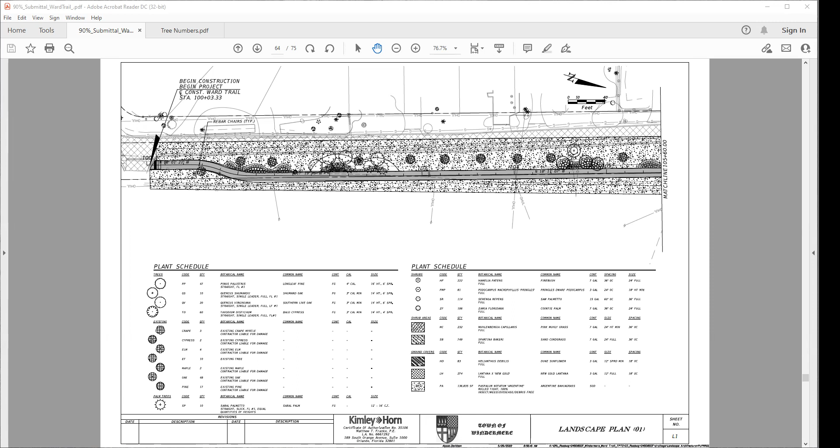So yeah, it's mostly staff. This presentation is for you, but it will be posted on our YouTube channel and social media site. If Mike just wants to give a quick overview - we do have two council members online right now, Councilmember Davitt and Councilmember Martini, and Chris Davidson, I believe, is with KHA. That's right, Chris is our primary roadway designer for this project. All right, thank you. That's Mike Woodward with Kimley-Horn and Associates. They've been working on this for quite some time, and we are still awaiting, hopefully, funding from the Healthy West Orange Alliance, which has dedicated about $5 million to interconnecting all of the trail systems within West Orange County. With that said, I'll turn it over to Mike to present the 90% plans.

Great, thank you, Robert. Hopefully everybody can see my screen, but what I want to start with is near the end of our plan set. Robert mentioned we're at 90%. Once you get to the back, that's where our landscape plans start. Page 64 out of 75 is the landscape plan. So I am going to spend some time explaining these and going over some of the different areas that our landscape architects came up with to really make this area special.

A lot of the alignment is similar to what we've presented in the past, but we have made some additional changes, primarily for tree mitigation. We had several meetings in the past. We walked the site early on. A separate arborist was hired by the town and walked up and down with town staff to figure out which trees were invasive, which ones should be removed, and to account for all those things.

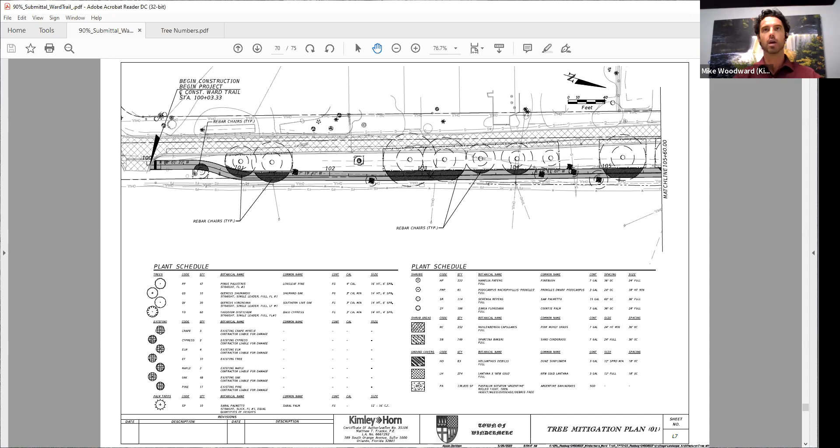So we took that arborist report, and since then we've even modified the alignment - that was back in December 2021. Since then, we've modified the alignment further to move even more, to provide more protection. Some of the recommendations were to do root protection or root pruning. And where we thought, well, maybe that's not enough, can we move the trail a little bit farther over to avoid more of that critical root zone? So we did, and by doing that, we were able to save even more of the trees.

So what you see here, starting on page 70 out of 75, is the initial critical root zone, which is the first circle going around the tree. Then that second, larger circle is more of the total size of the canopy. If you go through a portion of the area in that outside circle, the tree's going to be okay as long as you're not taking about 50% of it. So if you look at the trees, for example, at station 101 plus about 20, we're able to keep those trees by shifting the alignment and staying a little bit farther away.

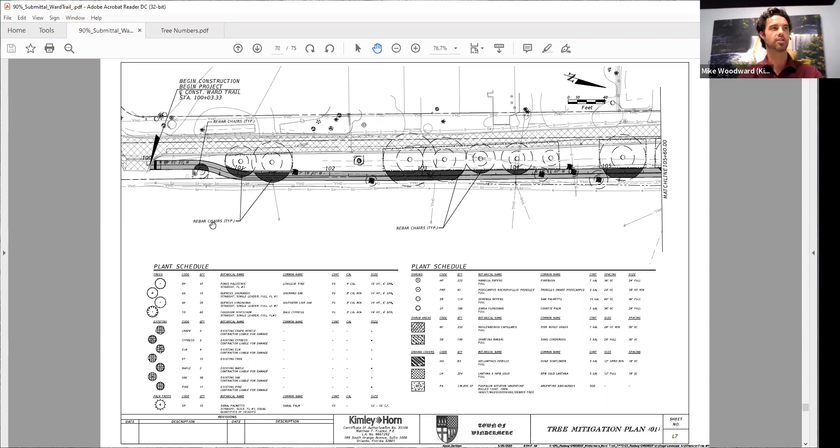You'll also see this note about rebar chairs, where we have a detail showing what that looks like. Basically, before too much construction happens, we'll go in and set these rebar chairs that allow the rebar to be a little bit higher than normal. We'll have specific notes for the contractor to place washed stone carefully to avoid damaging the exposed roots and not compact the soil in those areas. By doing that, we can provide an extra level of protection for several of these trees. So anywhere you see in this tree mitigation plan this dark hatching, that's to indicate the rebar chairs.

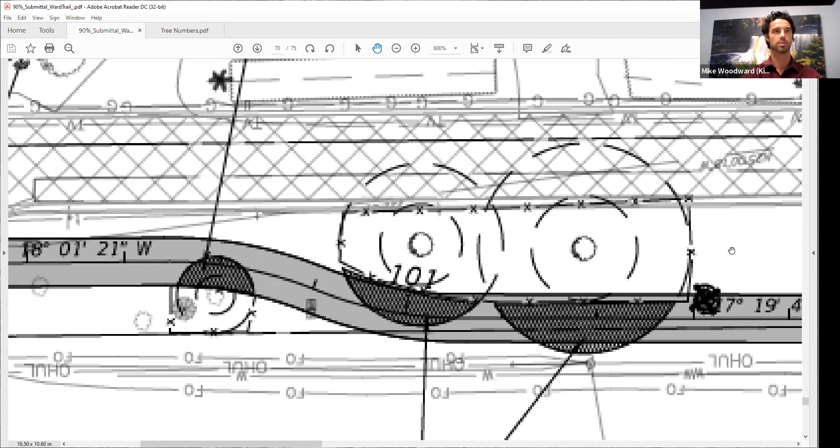Another element to point out here: this little fence with the X's is a fence to protect the root zone of the tree. That would go up before construction starts and stay in place the whole time to protect the tree roots. In addition, we're calling out where to put in rebar chairs.

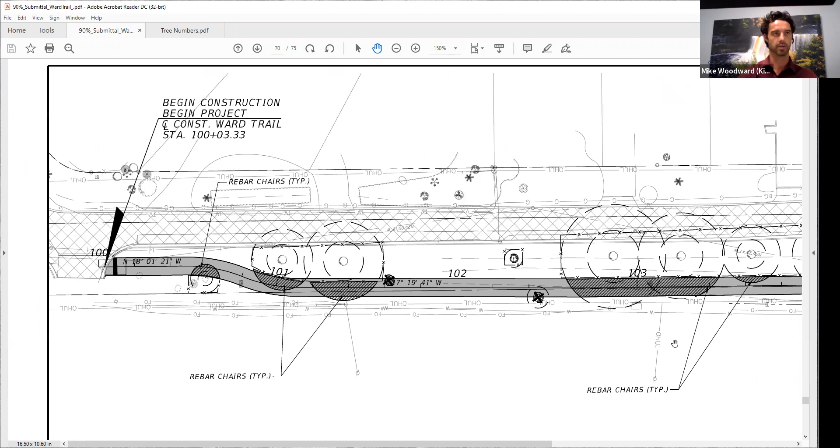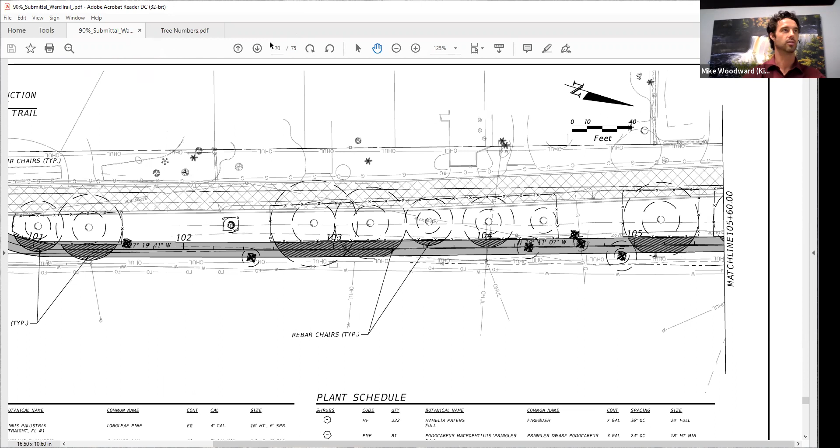This tree mitigation plan also shows which trees are to be removed. We've accounted for those, looked at the species type and everything. A huge amount of effort has gone into trying to protect the trees and preserve whatever trees we can. That's certainly the case for the southern portion of the trail.

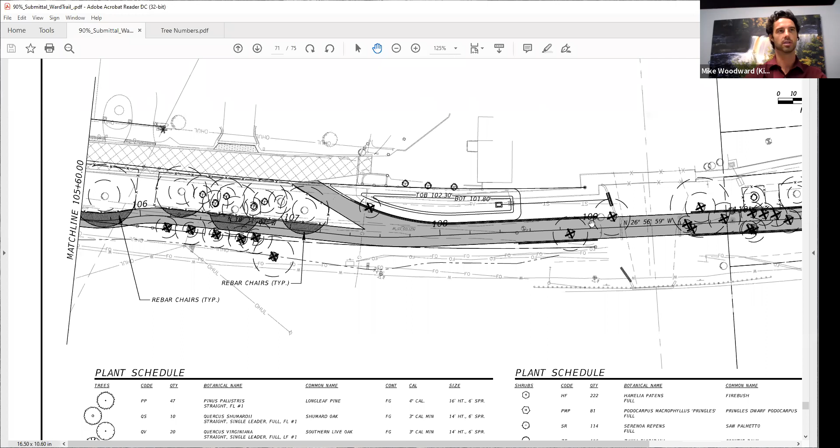As we continue moving along to the right, that's to the north, so get oriented that way. As we get closer to the canal, which you see right here, we do go right through a couple of trees, and there's really no way of having this align with the area on top of the berm on the other side of the canal without impacting those trees. It's unfortunate.

Some of them are pretty cool trees, but we're very limited and constrained. At least one of these is a pretty large, substantial oak.

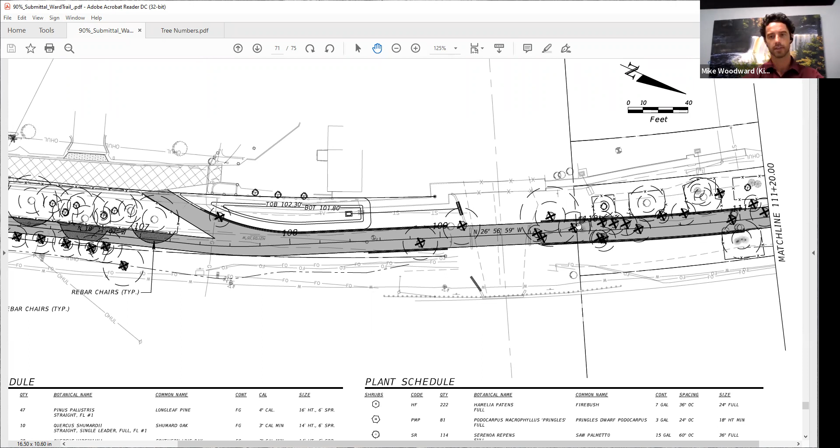Once we get to the north area of the canal, there's a water body to the left, just an open water drainage system that goes to the canal. We want to do everything we can to not impact that canal or that open water, which means we're going to try to stay on top of the flattest part of the berm in that heavily wooded area. This is the area that has the vast majority of the tree removal.

It's just very thick, very dense in that area. Our plan is to stay on top of the berm there, so as to avoid having to build up using fill that might impact other areas, either closer to Main Street or closer to that water body. So we're kind of just staying in the middle and doing what we can in this area.

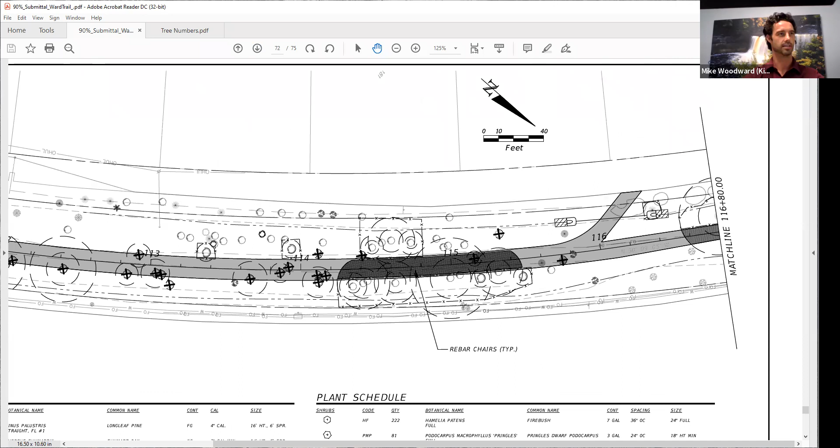Mike, can I interrupt you for one second? Sure, yep. Where is the canal on that previous drawing?

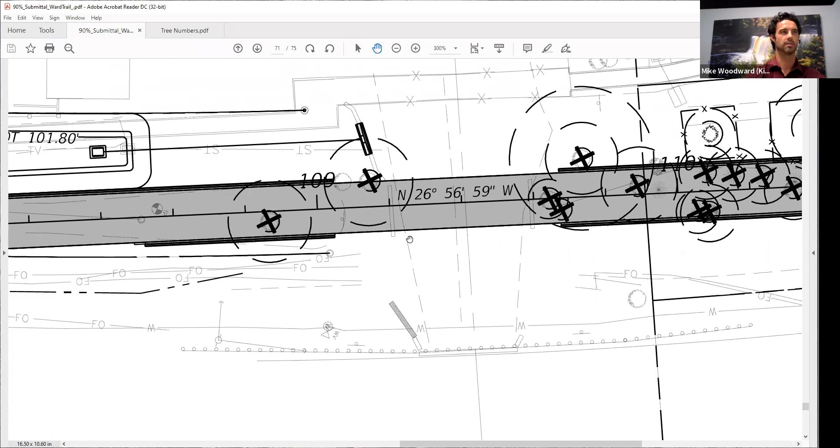Sorry, I did not do a good job of orienting everybody. This is the canal right here. These dashed lines are the open water area. We have some bridge plans that show this in different detail, but the canal's kind of right in here, around station 109.

And you'll notice immediately south of that, we've got this shared pond site that will also provide some water quality, storage and conveyance for the old dirt main paving project. There are internal staff-level discussions about what's going to go first, who needs to build this, and how do we show this pond in a way where we can build it to benefit both improvements, since it's a shared pond there's just that extra coordination.

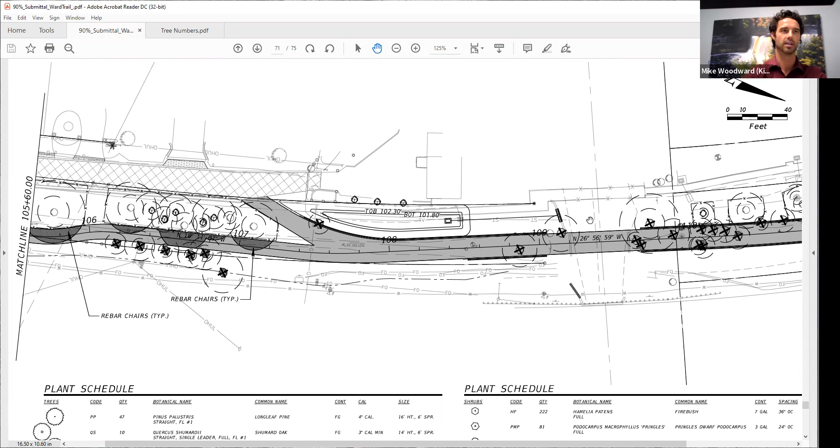Got it, thank you. I apologize for not pointing out the canal earlier, but it's right here. All these trees here are in that area just north of it.

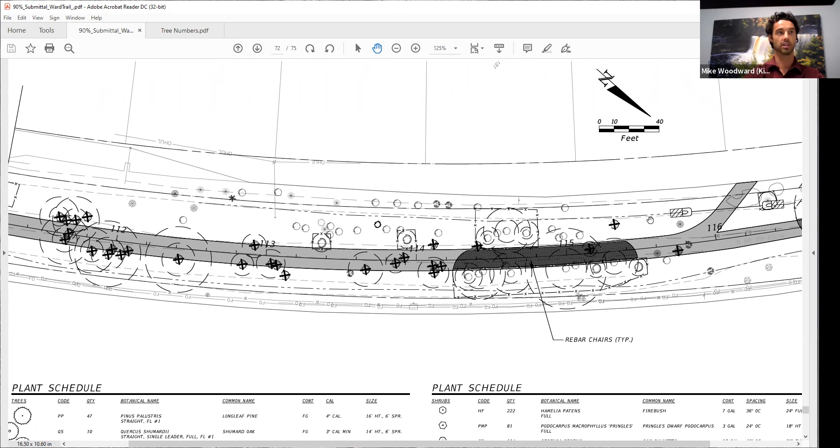Now, as you get around station 115 or so, actually a little farther up, station 116, that's where the heavily wooded area starts to clear out. We initially had this connection you see over here—this is the golf cart connection to South Lake Butler.

I don't know if the report pulls up, but one of the notes from the arborist was talking about a longleaf pine near South Lake Butler, just north of the wooded area, north of the canal. We had shown it as remaining, but the recommendation from the arborist was to see if we can relocate that connection to avoid root damage.

So we did—we moved it a little farther south. We've got to have a little bit of a pipe underneath it. But that is one change from the initial alignment, where we moved this connection to further avoid the roots of this tree, just to try to get as far away as we can.

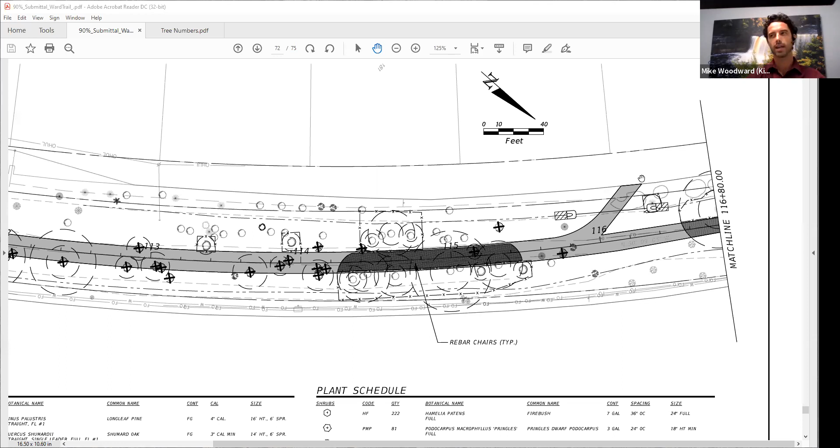To do that, we will connect right at the edge of that wooded area, whereas previously we made it past the wooded area and then connected over. So that's just one pretty small change.

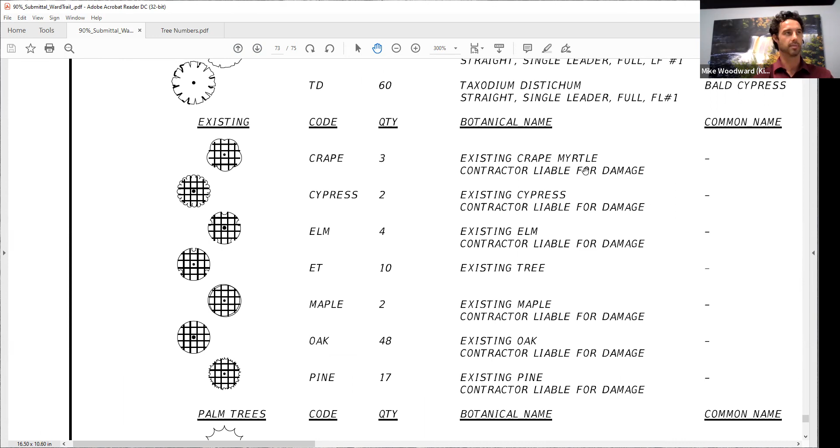Already kind of gone over these in some detail. The other thing to point out is these trees with the cross hatching, as shown in the legend. These are different types of existing trees, and we have to note that the contractor is liable for damage. These are trees that are generally not impacted, but we still want to put that fence around them to protect the roots. We call them out here and make sure to take care of them separately so that they are preserved.

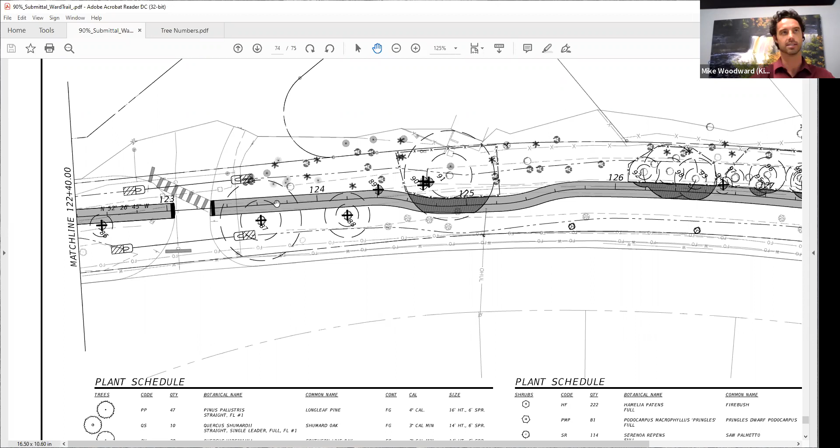Not too much new going on. Once you get to this portion, this crosswalk, that's the existing crosswalk at the connection to South Lake Butler, where north or to the right of this point is where the existing sidewalk is. Generally the alignment along the sidewalk, we kept that alignment and just widened the facility. So there are still some additional impacts, but we were generally following that existing sidewalk rather than pulling up the sidewalk and starting with a brand new alignment. We said, let's see what we can do to just keep it as much as we can.

And then that gets you to the northern end. So that's our tree mitigation plan. That was the last part of this. As promised, we'll get back, I think it was page 64, to go over the actual landscape plans.

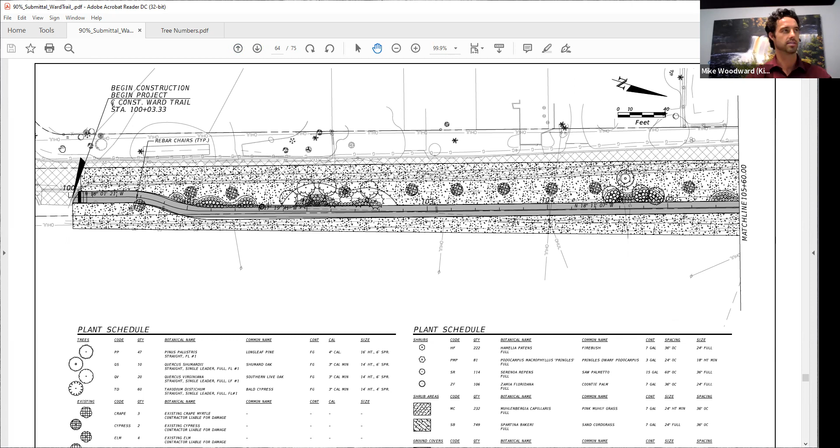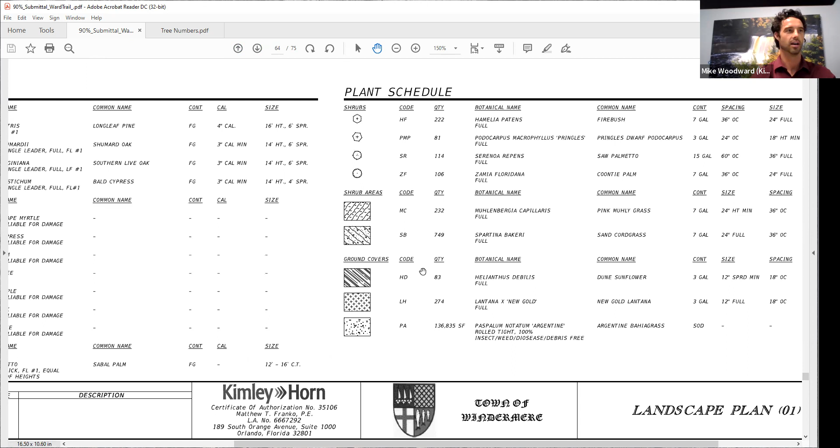Yep, 64. So starting at south, that's our southern limits. As you can see, everything has a legend, but this dotted area is just regular grass - I think we're using Argentine Bahia grass. As you go through each area, we have this transitioning so that there's a different feel as you move through. We don't have it right now, but a future consideration would be to talk about the habitats or types of landscaping in the different areas and where you can find those in native Florida and such.

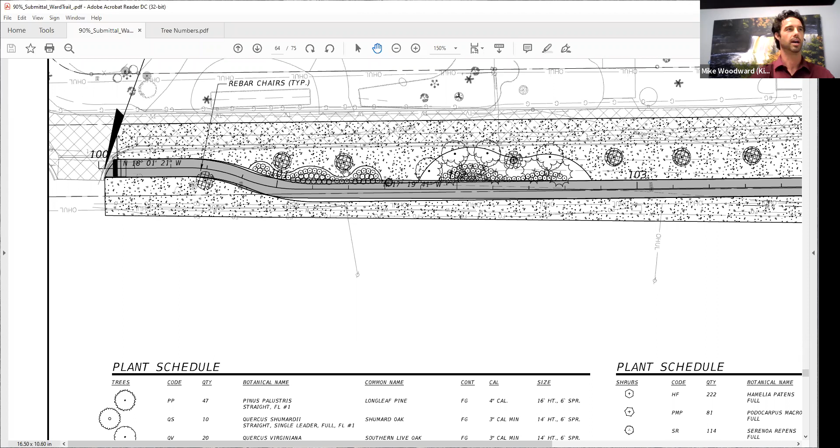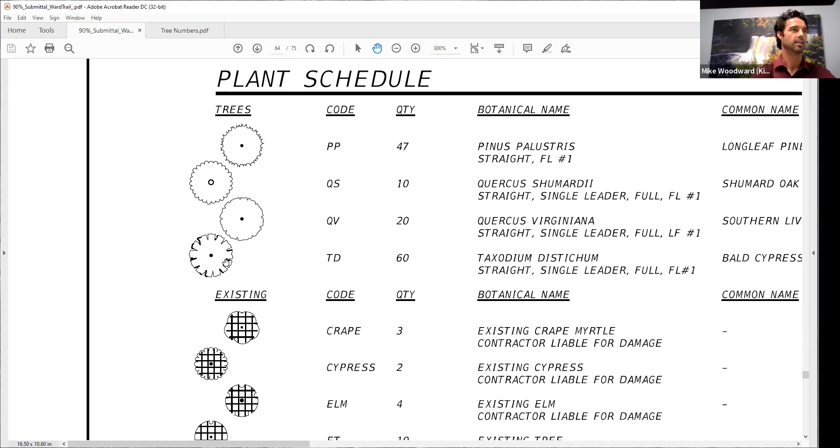Again, the ones with the hatching through them are existing, and these other ones are new trees. So let's take a look. We've got this one with the squared but indented portions - what kind of tree is that? That's this guy, bald cypress. Oh, I'm sorry, nope, that was the southern live oak, this one, right? Southern live oak, that's what we've got here to start with.

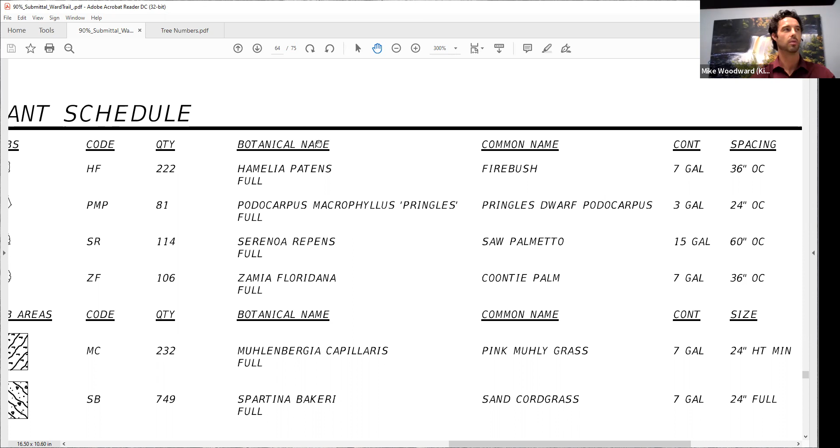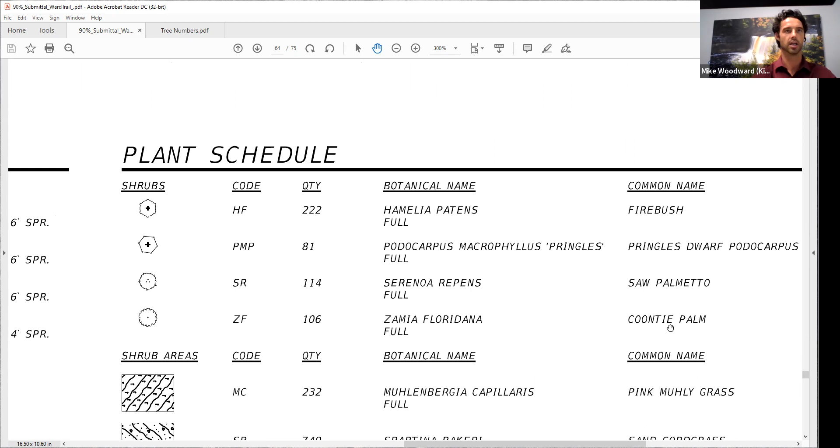As far as the shrubs right next to the trail, we've got this little hexagon with a dot, and the other smaller, more round shrub. Let's get over to that - that would be your Pringle's dwarf Podocarpus, probably butchered that one, but I want to point out these types of plants were recommendations from the tree board. We asked, what types of shrubs do you want to see, what types of trees do you want to see, and then built on that to come up with specific recommendations. The other one there was the Coontie palm, so just some smaller shrubs. That was to start with.

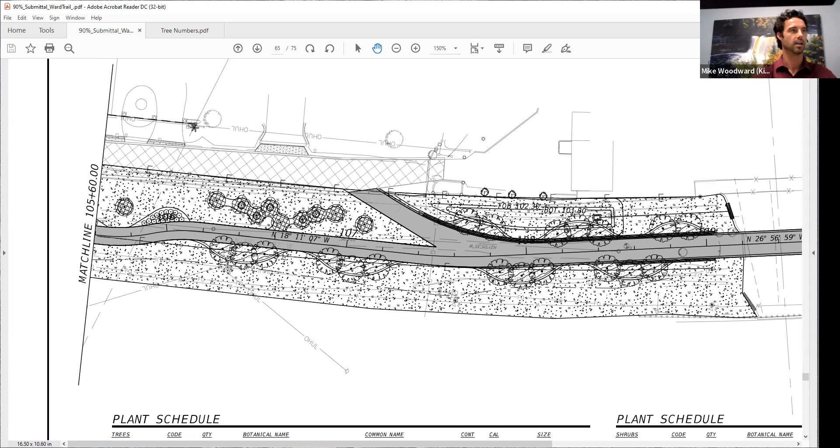Once we get farther up, we're using some of the same types of trees initially. Let's jump up to the next plan sheet. Now we're getting to where this is the northern limits of Old Dirt Maine. So now this is where the cypress comes in, right? It's a little bit closer to the water, so it makes sense to have more cypress.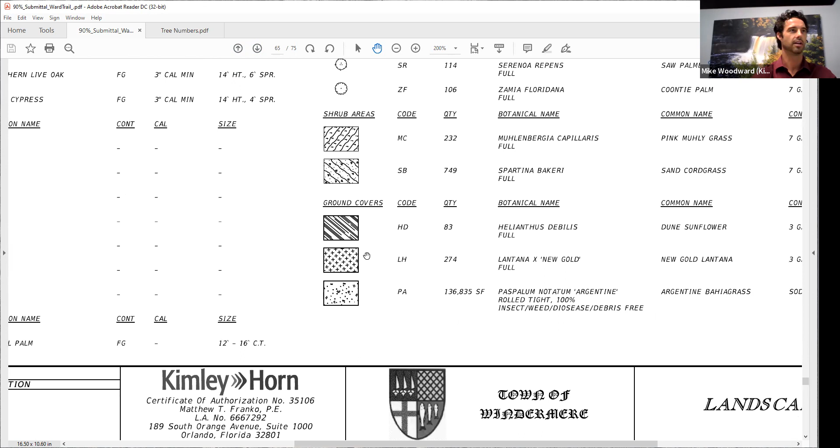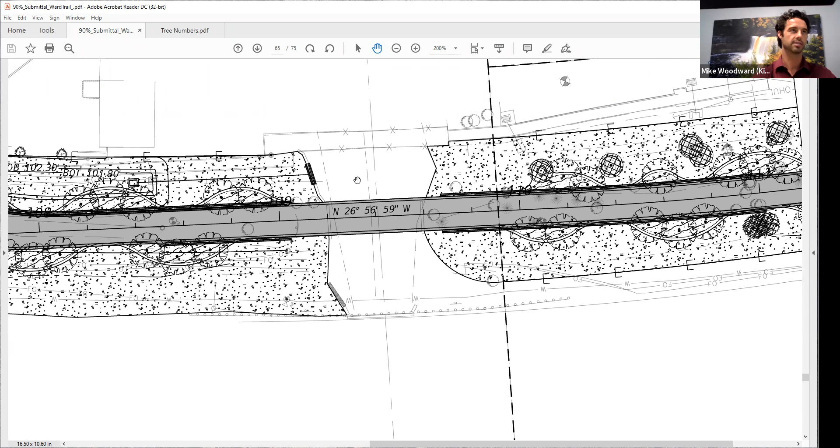You also see this wavy hatch pattern with the little triangles in it - that's down here, going to get some sand cordgrass included in that area. So again, we're changing a little bit as we get closer to the water. Once we get north of that area, we're replacing some of the trees we're taking down with ones appropriate for the different areas. Since we're near the water, that makes sense to have cypress trees. And again, the other ground cover is in here as well.

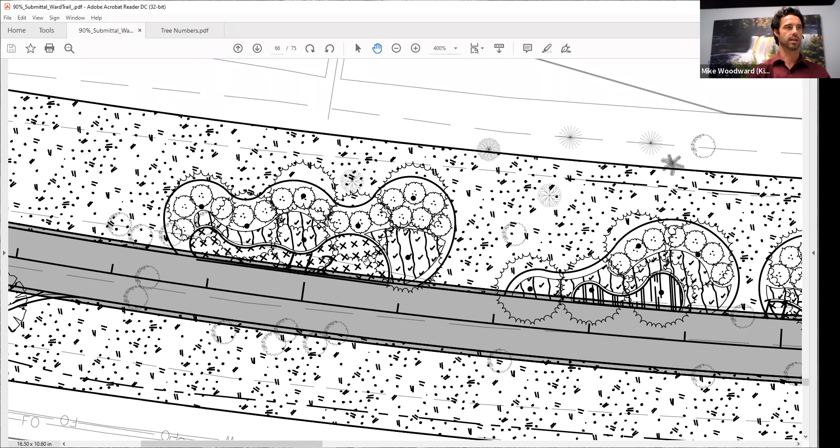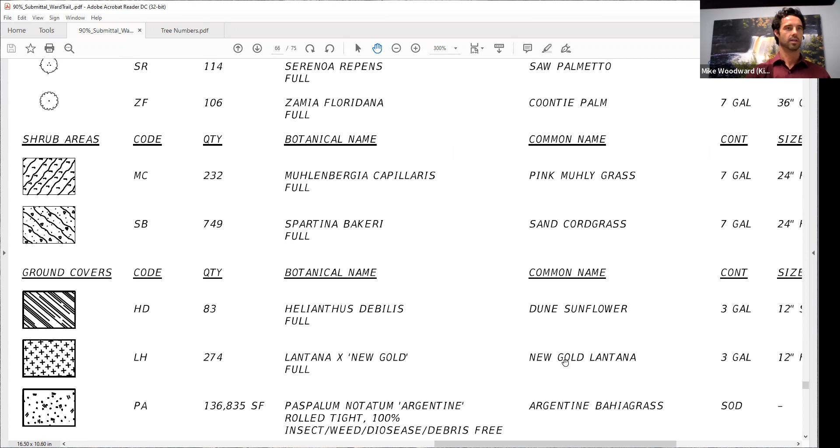Continuing on north, and I'm sorry if I'm making anybody's head spin by panning around, but this is still in that kind of heavily wooded area. Now we've got a couple different types of ground covers, where we've got this kind with the X as well as the little plus symbol. So we go down, we'll look at it again over here, and that's some lantana. That was the little X or plus symbol next to the sand cordgrass. So we've got a little mix of it in here.

And then this is a new type of tree that we haven't called out yet, this one with the little spiky edges. That is your longleaf pine. We did have a comment that longleaf pines make sense in clusters where you can keep them together, as opposed to just one tree here and there. So we've got a cluster of longleaf pines here, as well as another one over here, and this whole area is pretty heavy with longleaf pines.

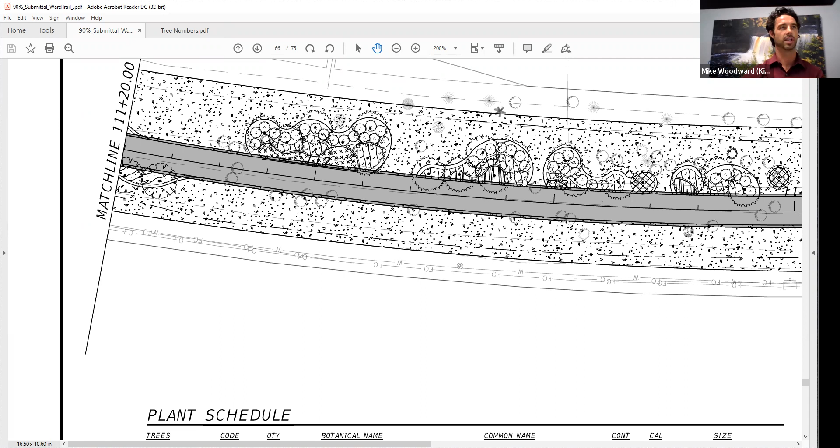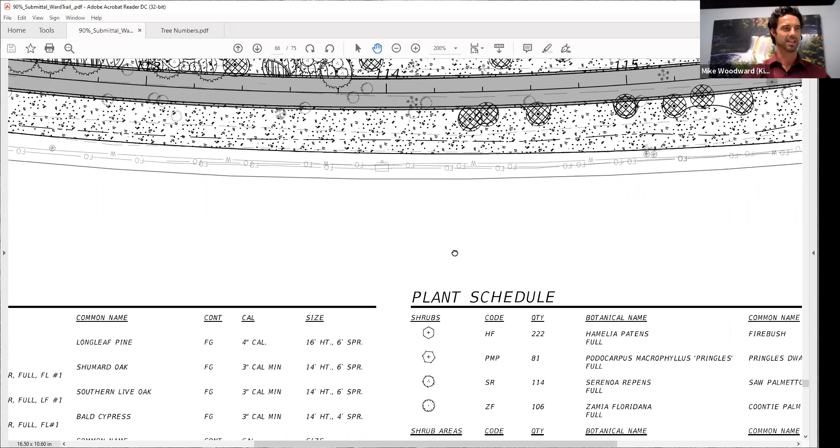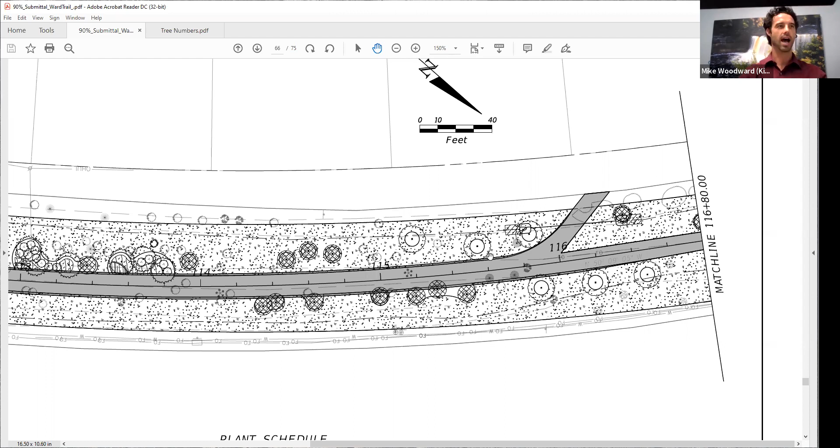That's more of a pine habitat with some of that different kind of undergrowth, and then these other shrubs, which were firebush, right? Nope, it's Coontie palm again, right? Let's take a look. I'm not the landscape architect, but I did talk to him earlier today, so I'm not going to be able to remember every single one. That was the saw palmetto, right, the symbol here. You guys can certainly go through these plans on your own, and if you have comments like, I don't think saw palmetto is all too great in this area, I'd rather see something else, let us know. But we really think this approach—our landscape architect spent a lot of time designing this in a way that could highlight different types of Florida habitats.

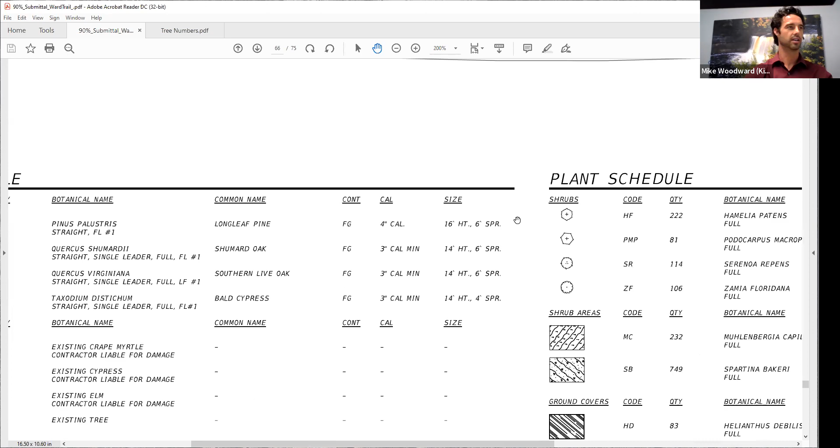So once we get out of this pine area, moving forward to where we're taking the golf carts off the path, we switch it up again, and now there's this type of tree, which is again the southern live oak. Lots of oaks. And again, we've got another different habitat area in here, but I think I've given you enough of a picture of what we're trying to do, so I'm going to move on and talk about the overall alignment.

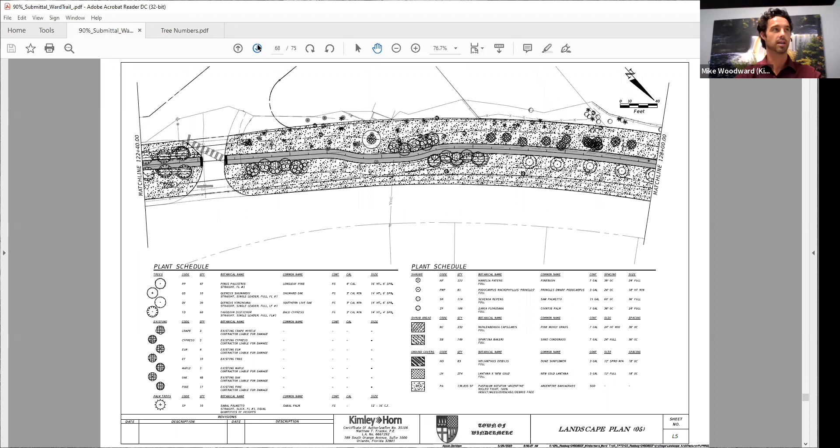There's a few more pages of this as we go on, we just continue to have specific plans of how to landscape this area. Again, our landscape architect spent a lot of time thinking about how to incorporate these trees into the environment, while also doing our best to mitigate impact on the existing trees, to keep those as much as we can. And when we can't, we're certainly replacing them, not in kind—we're putting down a lot more trees than we're taking out.

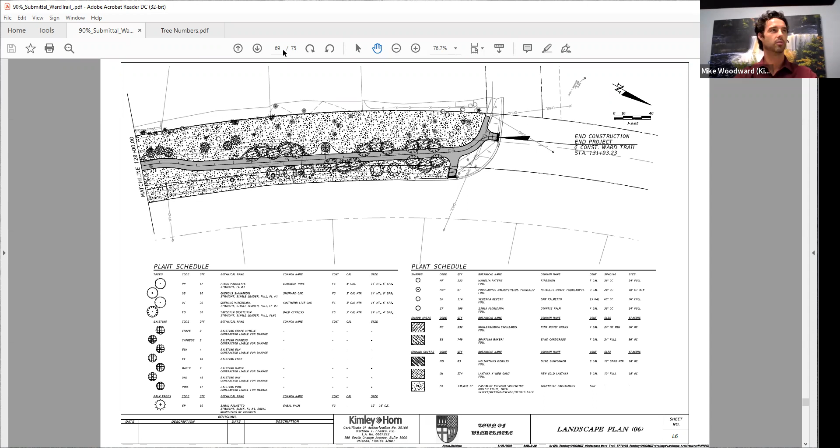There's a desire to minimize the amount of cut and fill, so that whenever we do have to add some fill, meaning add some dirt, we're trying to do the smallest amount possible, because that has an effect as you go farther away. We don't want to add a bunch of dirt in one area that ends up covering up the roots of the adjacent trees, which would then impact their health. So again, we're taking a lot of steps in different ways to protect the trees as much as we can—hopefully that's a theme that comes through with this. But we did modify the alignment to get a little bit closer to Main Street, and the goal there again was preserving some of these trees that we initially showed as impacting.

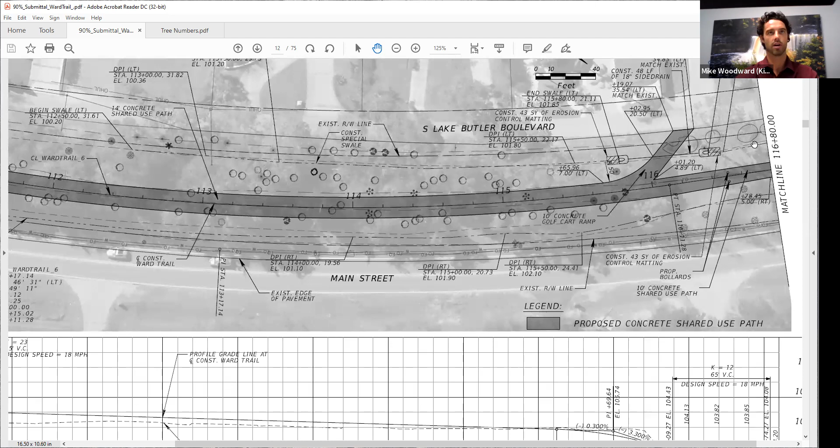Moving along farther north, we do have a little bit of a meander here where we start. You can see the path moves a little bit east and then kicks back a little bit west across the street from where Lake Down Circle would be. Again, this was to maximize or minimize impact to different trees.

We certainly have more curves, horizontal and vertical curves in this area, and there will be more cut and fill than in the flatter areas, but we kind of show all this. We're also going to include some swales in this area to help with water quality. That's the primary reason we're putting those swales in.

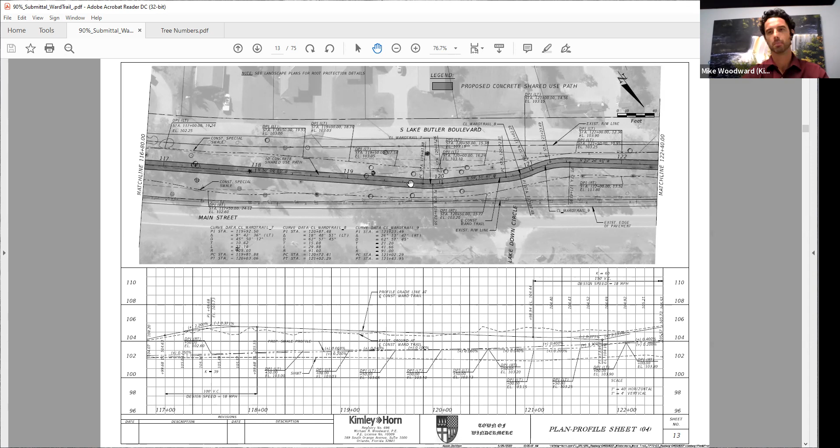This being 10 feet wide will have some runoff, but with all the space between, there's minimal need for swales just for conveyance. So the primary benefit of those swales is water quality.

As we get up towards the connection to Lake Butler Boulevard, we do have some pipes with mitered end sections that connect the swales on each side of this path. We're really trying to make this have as much synergy as we can by providing some of these drainage and water quality improvements while we're building this path. That's what these items are here, with a pipe underneath that connects them.

This area here where the path kind of dips down, again, the idea was to avoid impacting some of the trees, to minimize impacts to roots. But we've got a proposed shared concrete path, 10 feet wide.

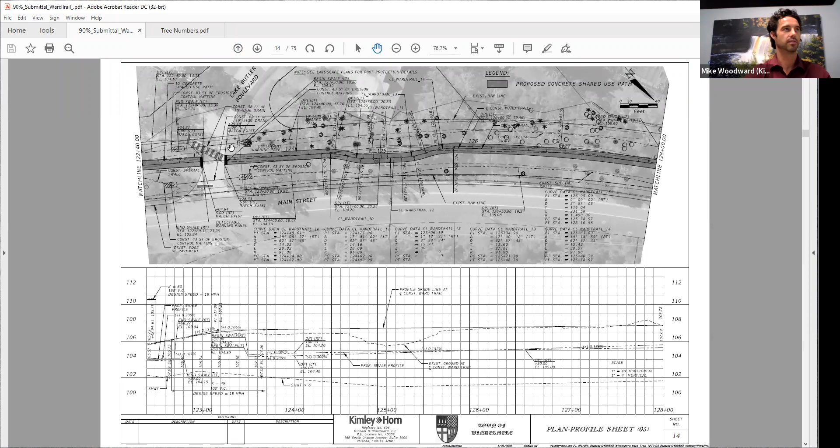North of Lake Butler Boulevard, we're generally following the alignment of the existing sidewalk, except where it jogs right now—like it jogs and there's a little bit of a pipe and a ditch, if you're familiar with this area. We're trying to straighten that out to make it a lot smoother and also have fewer impacts. So that's one area where we do deviate from the existing sidewalk.

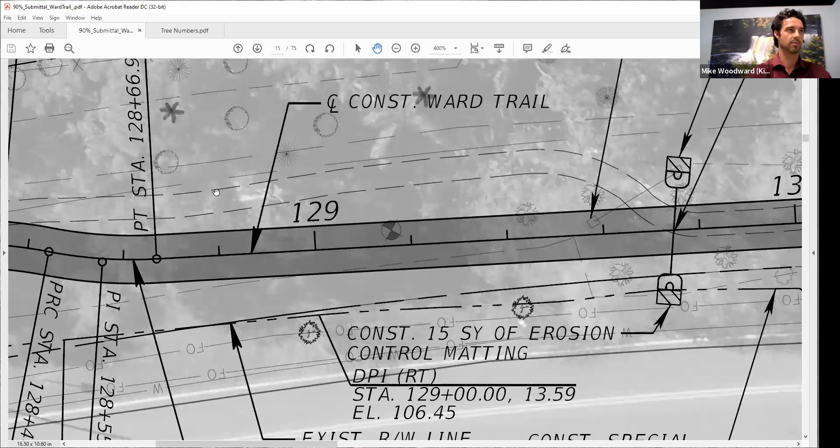The existing sidewalk is here in these dashed lines, which does, again, we kind of curve over a little bit earlier and then straighten out. North of that little connection, we are kind of right back on top of where the existing sidewalk is again.

Something else that I wanted to show you—I don't want to guess what page it is. I think I wrote it down. It's 54. There we go.

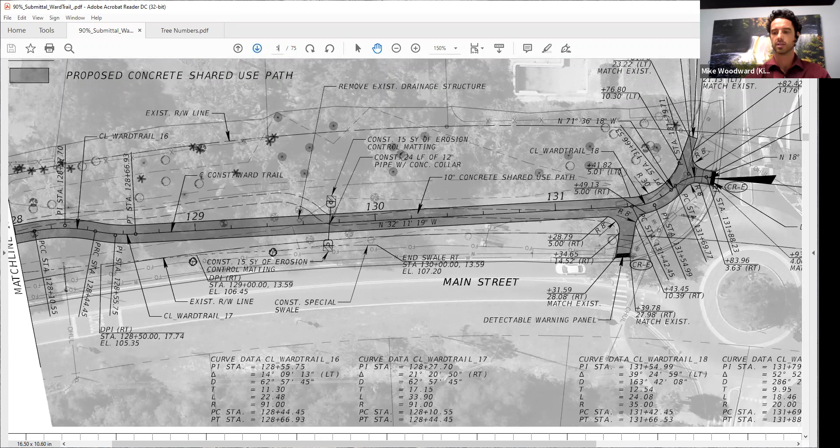Page 54 gets you a little bit of detail about the bridge itself. So this is generally what the bridge would look like. This is not to scale—it does have some information on it, but the picture itself is not to scale. The dimensions are correct, though: 63 feet is the distance that we needed.

And we did that by having some walls that go up to the bridge, which was a cost measure—we were trying to keep the cost low by reducing the length of the bridge. So there will be some walls a little bit in advance of the water line.

You can see here, this line is the 100-year flood, whereas this second line is just more of a normal high water area. So if you're probably accustomed to seeing the water about right here, the bridge will continue beyond that point. We've got the bridge a little bit longer, and the cost really goes up around 75 feet, and certainly at 100 feet it goes up almost exponentially.

But to keep some value here, we wanted to have a combination of this wall with a pedestrian railing above it that would then match the height of the railing that goes across the bridge. Now again, I said this is not to scale, and the main difference is the actual span going across the bridge—this arched or bowed portion—that's a little bit higher than the pedestrian railing.

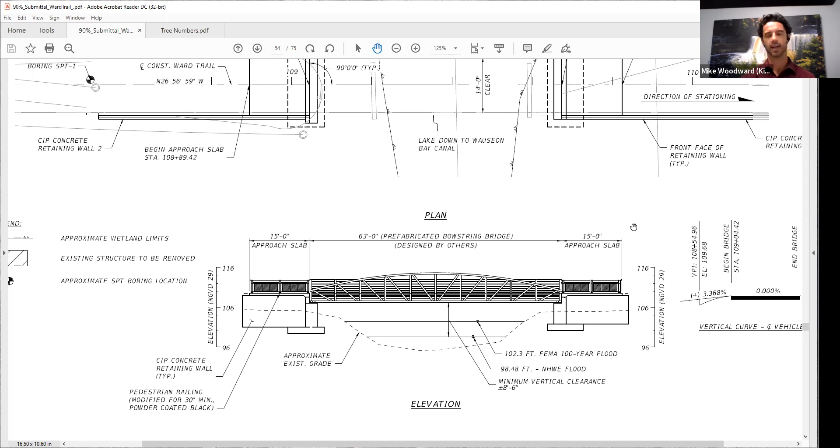The pedestrian railing is only 30 inches high, whereas the height of the bow was higher than that, and that had been previously determined in coordination with the town council.

So this is where our bridge details are. After the middle of the plan sheets, we've got a lot more details on the bridge typical section, but it's generally 14 feet within the rails. We do include these rails here that just provide a vertical picket to prevent anybody, primarily from the golf cart, from bumping into the vertical portions of the bridge.

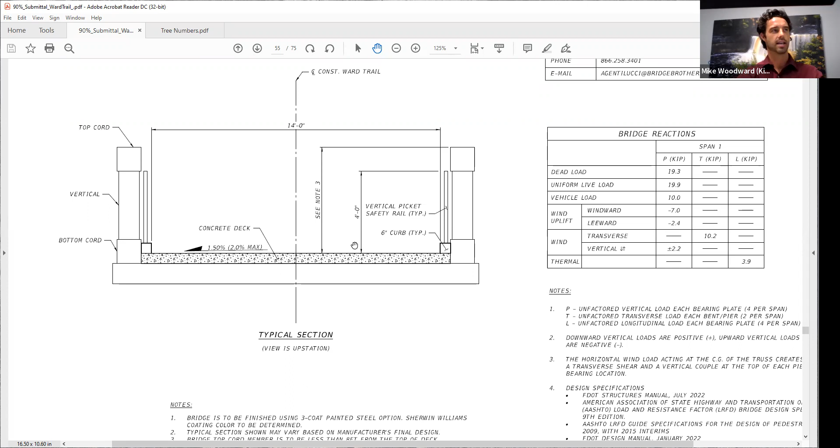But we're proposing a concrete deck. It's got to be at 2% max slope, but we're proposing 1.5%. That's just so that water drains off of the bridge portion. And we've got all kinds of other information about the bridge in this section of the plan sheets.

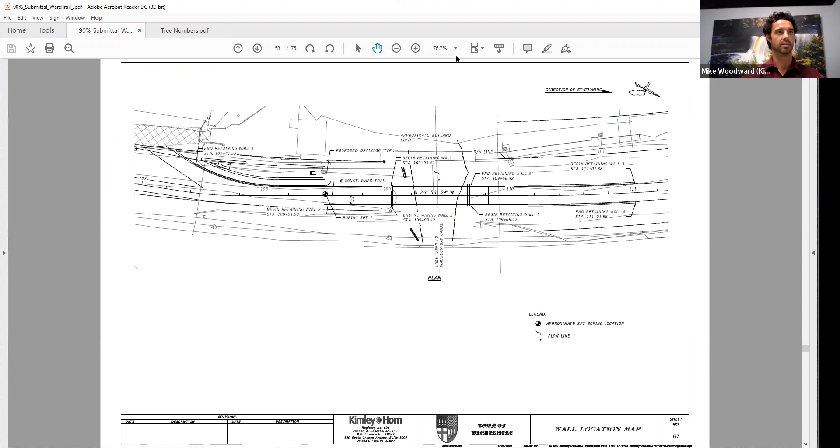Some details about the walls here, where they're located, where they start, where they stop. That's the retaining walls on either side leading up to the bridge. And plenty of other design stuff that I'll skip over and just kind of end here and turn it over for questions. But that's basically where we are.

And to reiterate a point that Robert made early on, we have gone through several alignments here. We started the project by walking through to try to set the initial alignment. Then we drew it up. We met with the arborist—well, town staff met and walked with the arborist. We took it back and accommodated as many of those recommendations as we could, and even took it another step to provide additional root protection or separation from some of those trees.

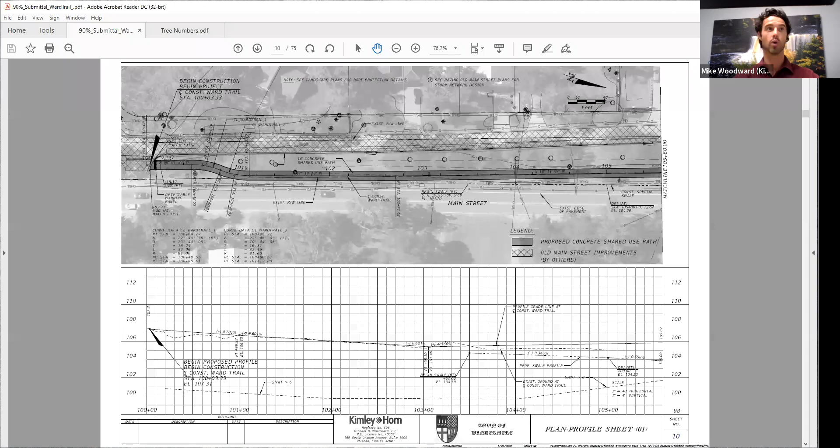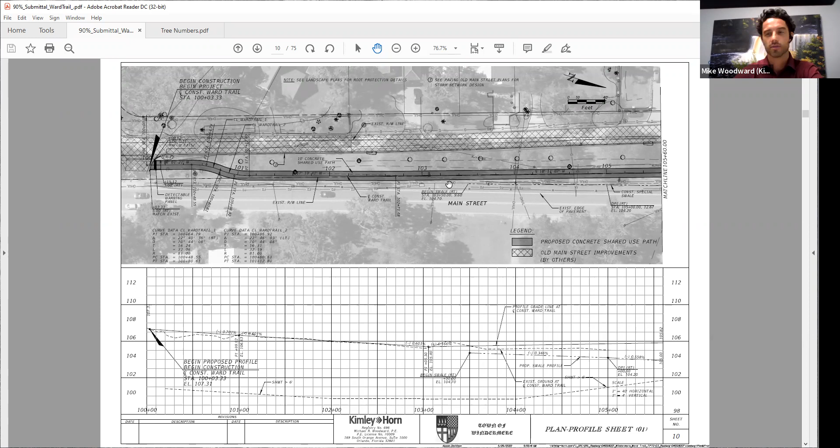And submitted 60% plans. We had a workshop at 60%. We took some comments from the public, and comments from the tree board about what types of trees, shrubs, and ground cover, and we've really tried to incorporate as much of that as we could in these plans. So what you're seeing now at 90% is sort of the culmination of all that work. That pretty much wraps up what I wanted to walk through, but again, if there are other specific questions, we can go into details on these plan sheets.

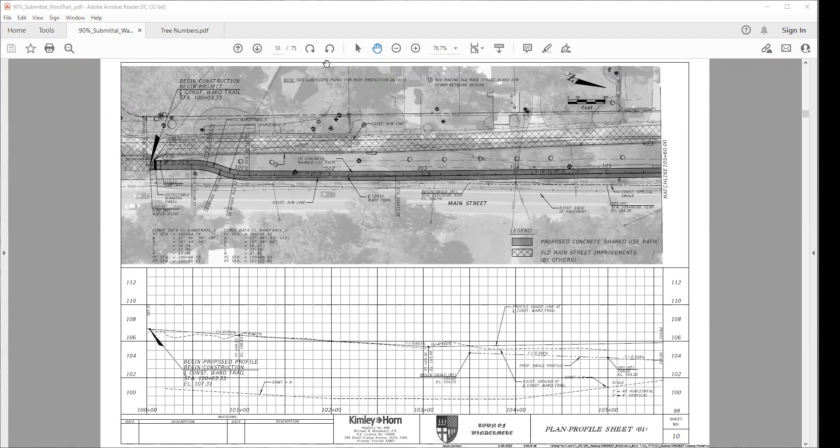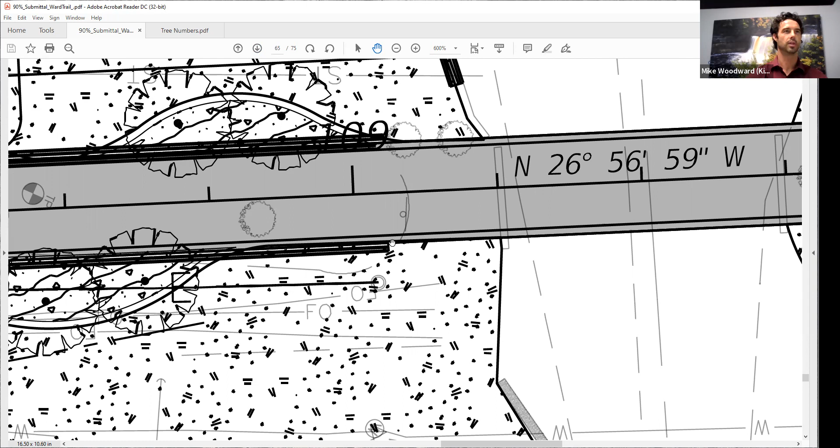And then the canal's pretty clearly marked just because there's sod—same thing on the other side. Here's the wall that's a little bit longer on the north end. But those retaining walls allow you to gain some elevation along the alignment of the path.

So the existing pedestrian bridge is coming out, correct? That's correct, you can see that here. As part of this plan set, we would include demolition of that existing pedestrian bridge.

Okay, good. And then the existing sidewalk is going to go away also, wherever it meanders, like north of Lake Butler Boulevard—all that's coming out as well, correct? Correct. And largely this will be replaced, aside from the areas where I was pointing out where I deviated; this will be replaced in the same area. But no, the sidewalk will be replaced.

It's not like we're going to just try to build something adjacent to it, right? We're not going to take the old sidewalk and put another 5 feet next to it. We'll rip up the old concrete, flatten everything out, and then put the new path down. So wherever there's sidewalk that's not within this linear path, that will be taken out and landscaped probably. Correct, I'm assuming. Okay, all right, good.

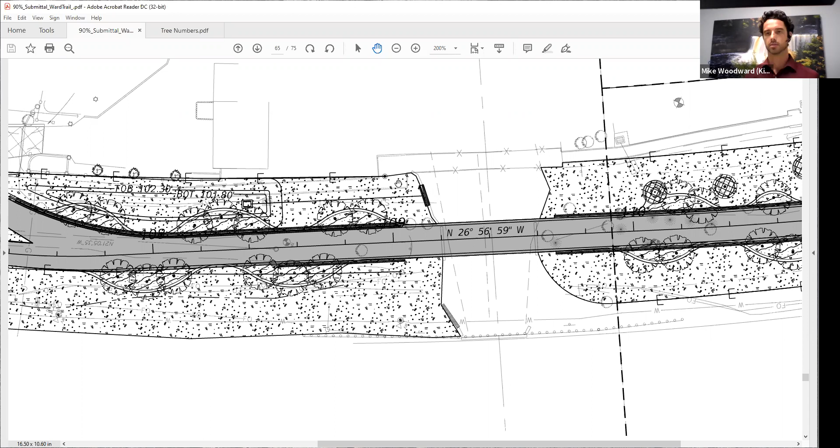Yeah, it looks good, nice job. Thank you. Credit goes to my team. Good job, team—yeah, that's for you, Chris.

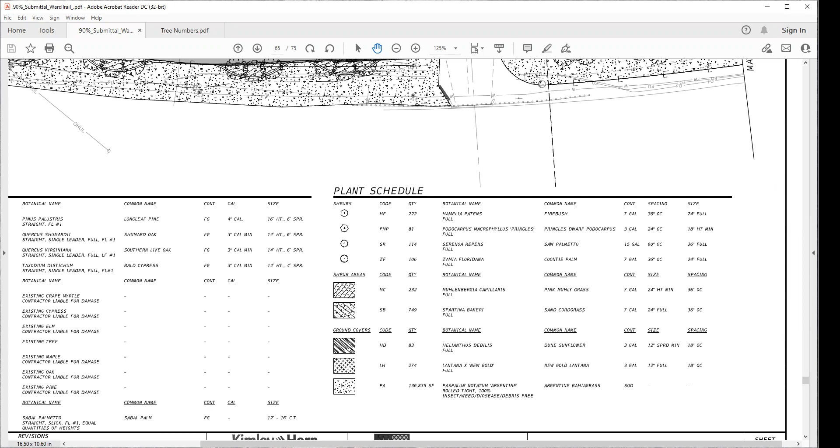One of my concerns has been the linear feet that the golf carts share with pedestrians or bicyclists. I know part of the problem has been the water on the north side, so I suspect that's going to remain. It looks to me like there's at least 450 or more linear feet shared by golf carts and pedestrians.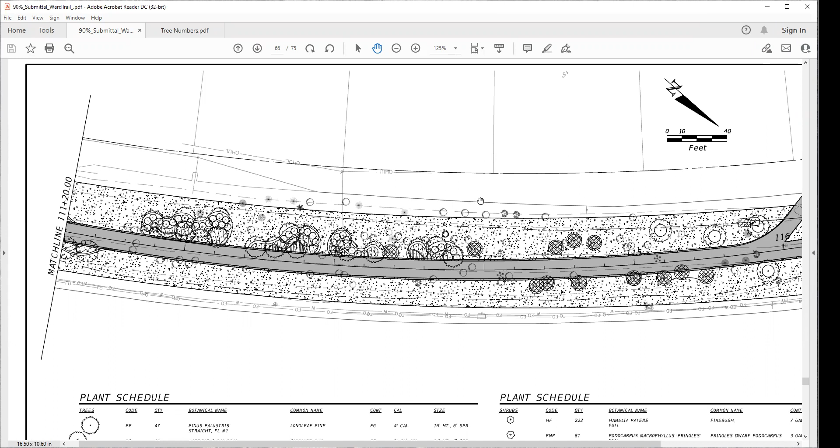My question is, after these plans are approved, is the town council going to consider putting in ordinances for golf carts, like Winter Garden has, where you can't drive a golf cart unless you're over 18? What's going to prevent teenage golf cart drivers from running me over as I walk across the bridge? That's my question of the day.

We currently have an ordinance in place, and we would look to make adjustments as we move further along, but yes, we can address that. I'd have to relook at our golf cart ordinance, but I know we did mirror it after Winter Garden, which is 18.

Yeah, it's about enforcement too. Of course. All right, thank you.

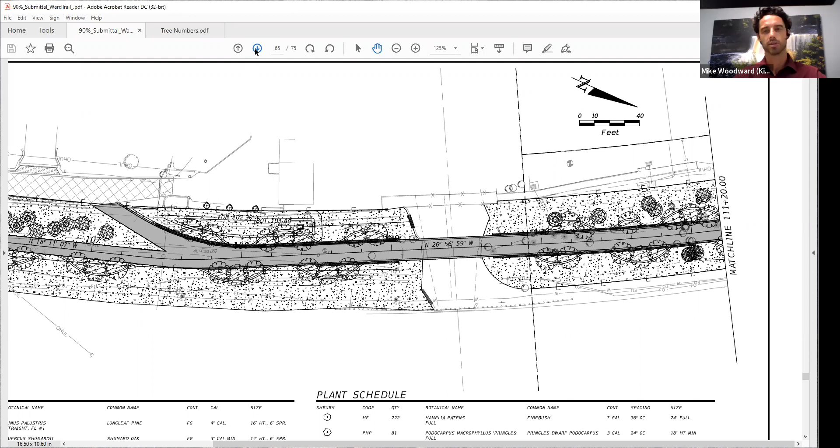Is that portion of the pathway wider? Is it 14 feet wide on the golf cart portion? It's 14 feet on the bridge itself, and then once you get off the bridge, it's 12 feet.

We wanted the extra width on the bridge because there's really no change to the bridge. Then it's 12 feet, which we thought was plenty, until the golf carts are off the system, and then it narrows down to 10. So it sort of steps down.

And the width of a golf cart, 14 feet is overkill - in case you have two of them, they'd need a huge lift kit with tires pushed way out to the side, like you're not even a golf cart at that point. So I think 14 feet is plenty wide, and 12 feet is wide enough for them to pass each other if there's a golf cart going in each direction.

I'd really hope teenagers are behaving responsibly if they're driving golf carts in this area, but in general, with situations like that, it's something you could address after you know it's a problem.

Well, it's like anything else - it's one or two individuals that I have to have a chat with their dad about, and it's been like that ever since my kids were little, trying to drive a golf cart. I've had people chat with me about my kids in their golf carts too.

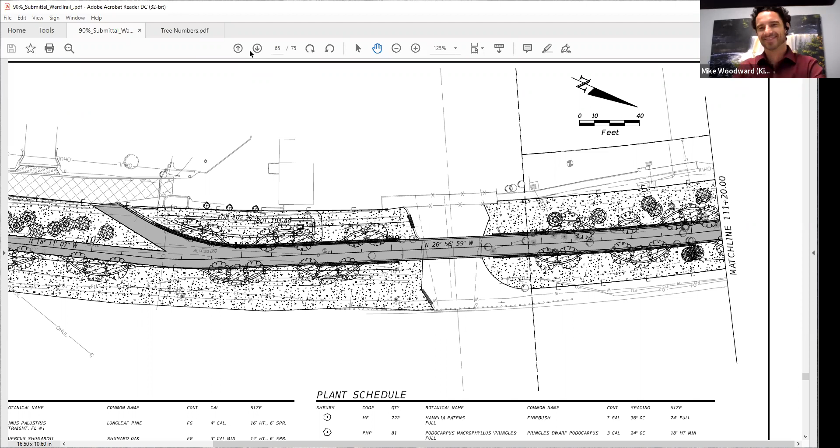Thank you, I'm glad you were happy to walk the site with us, Tanya. I was going to mention that in my first month, you did try to kill me. Maybe you should rewalk it again, it's July, so.